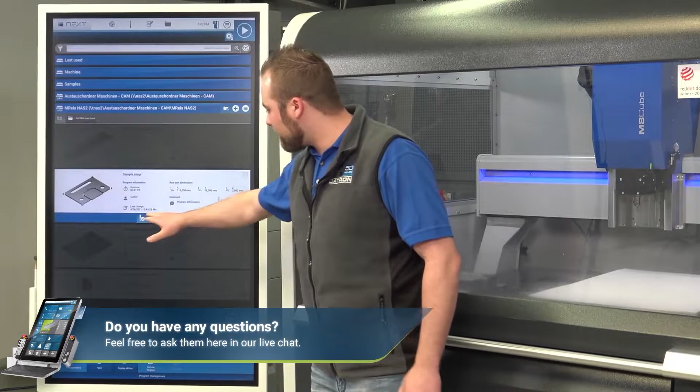On the right side, load program - there you can load it. Then we have edit and delete, so if you have to do something with the program, change something or delete it if it's wrong. The next step you can do is check your tools by tapping this button. Then you can see which tools you have programmed, and which tools are inside the machine and which ones you have to put inside the machine. We see here we have just one in the machine.

So this is this one, and here we have one that is not in the machine. This is a demo screen - we'll do this later with Mark also on our machine.

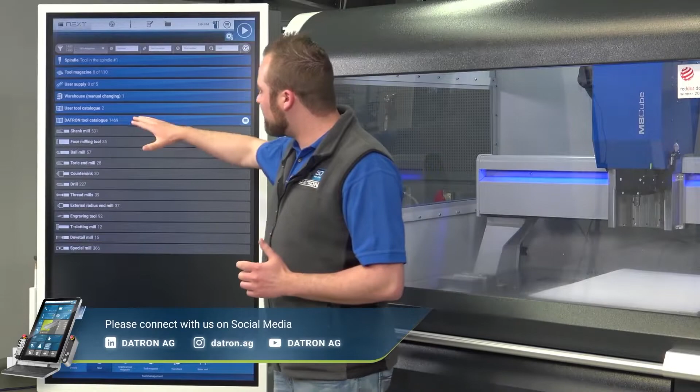So what we want to take a look at second is the tool management. You don't have to use the tool check by the program, but you can also check your tools by the tool management button. So here you can see all the tools that are inside the machine. But also you have here the Datron tool catalog where you can find every tool and also take a look.

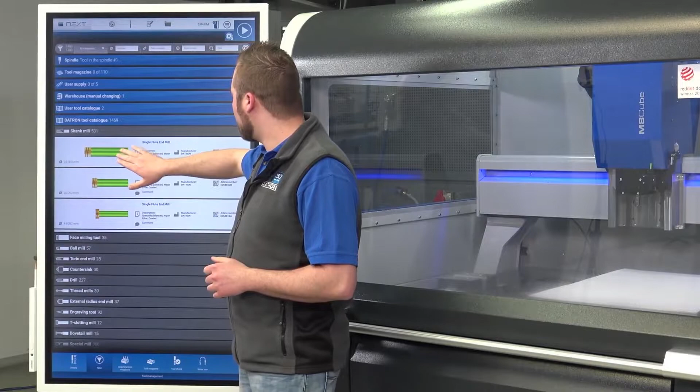So if we tap here, just a single flute, and then we can see a lot of information about the tools, and also we can set up these tools inside of the machine, or the tool management.

Next we want to see the workpiece setup, and for this I would give back to you, Mark. Right, so once we've loaded the program, either from our network folder or directly on the machine's hard drive, you just clamp your part.

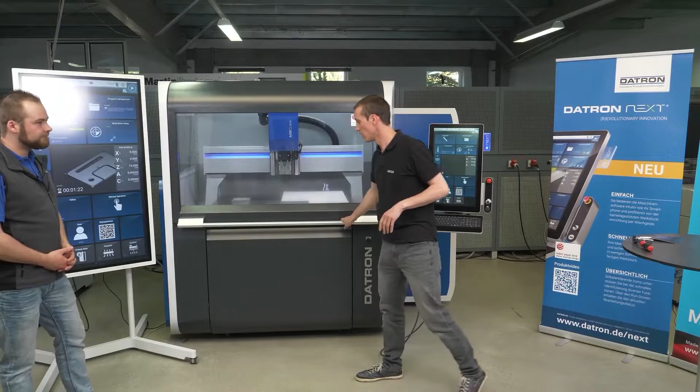In this case I just have a 3mm aluminum plate. I put that on my vacuum bed, switch the pump on, so work holding is just by vacuum.

And in this next step, that's what makes the software so special. It's measuring the origin, the orientation in the entire machine with a camera, with a live view, just by swiping over the display and drawing a different shape around the part, whatever it is.

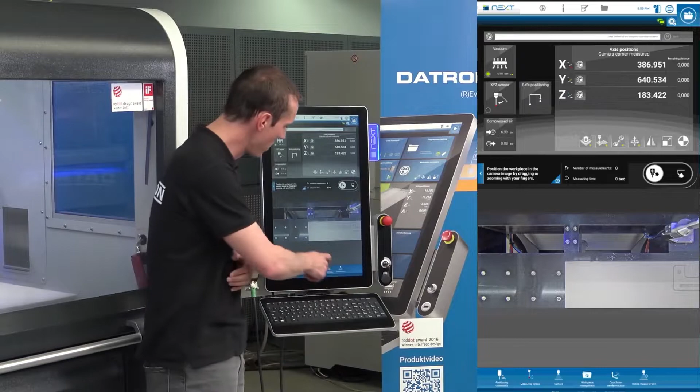So let me show you this. You go to workpiece setup, and now I've got a live view because there is a camera right on the z-axis. So if I drag over here the machine moves, and I keep dragging around, and you see the machine just follows where my finger goes.

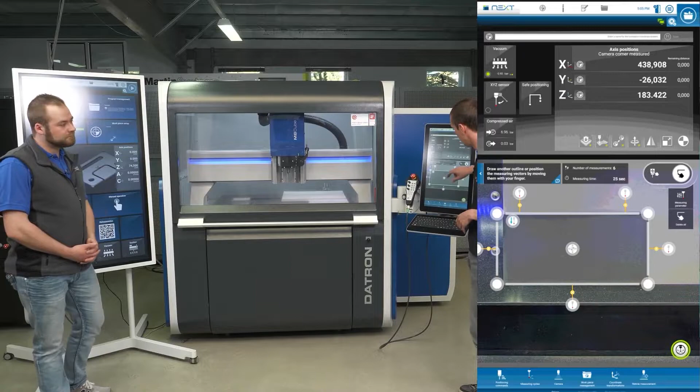So what I do now is place my part visually in the center of my machine, and all I do in the next step is draw around it like a rectangle shape. It doesn't have to be super perfect. And you can see it already brings in some measuring points.

And after hitting probe, the 3D probe will come and touch off this part, so it is perfectly located not only in X, Y, and Z direction, but also in rotation. So it's also getting the right angle if it's shifted and rotated around some axis.

Which is a big thing when it comes to a two-side operation, and you want the first side to match with the second. So that is an extremely important function to have, and you don't have to deal with hard stops, mechanical stops, and dial gauges to bring the part perfectly aligned to the machine system.

So that's it. All I did now was swipe over a little bit on the display, and my zero point is all set.

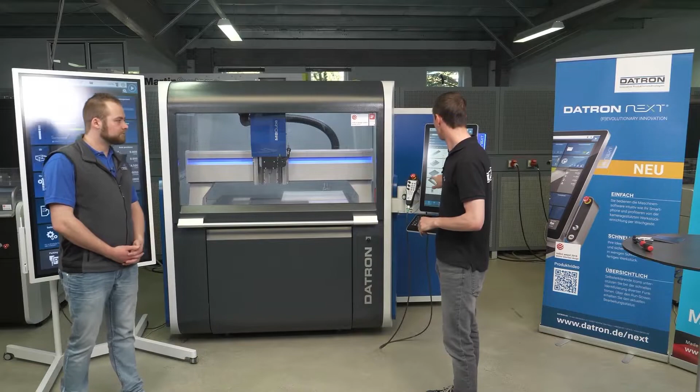Again, I go to my program management, just what Mario said before. I load the file, I get my preview here, and I'm just saying one execution, and hitting the play button.

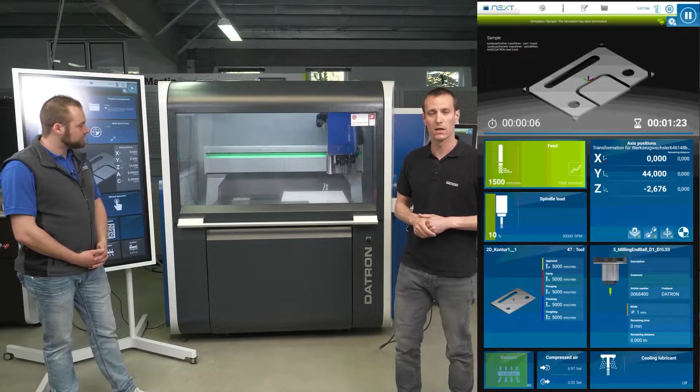So now the machine goes to the back, grabs a new tool, the first tool which is programmed in this program, and starts to work on this aluminum plate.

So there's nothing special on this part to see now. It runs for like a minute or so. Pretty straightforward, we're cutting something out on the vacuum table. We're going 3/10 deeper than the actual stock size, and then just taking the part with very clean edges right out of the machine.

Simply a great way of setting up workpieces, of setting up CNC programs. So Benny, can you tell us a little bit about the whole development stages? Where did it all start and what was the idea behind it?

It's a little bit Datron specific, the way we went with this control. In the past we made our own CNC control from scratch, called the HSC Pro. Most of you know them, and it is now 30 years old. We spoke about the age—in this kind we have a console UI, we have MS-DOS and things like this. And this is the age of the old control.

At one time we thought about the future of the controls. Make or buy, again this question. And we said okay, the Datron way is again to make it by our own, bring our own features inside the control and make it from scratch again. Yeah, and that was the first steps for it.

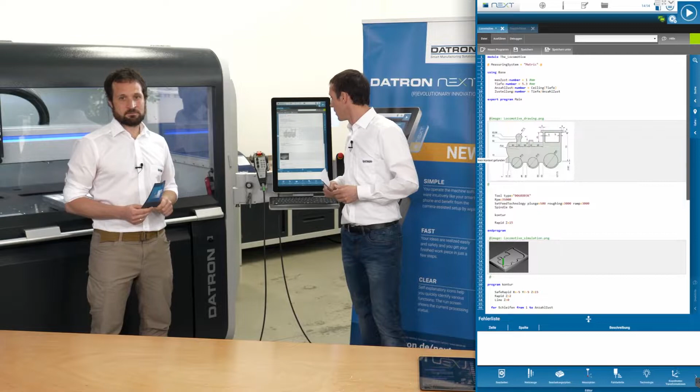We're currently adding new functions to the software, to the code, and we've brought you one of the latest features. When we take a look at the code now, here we can see it. This is the code down here in the training part, and I can now load pictures into my code—PNG files, JPEG files—and even make them larger.

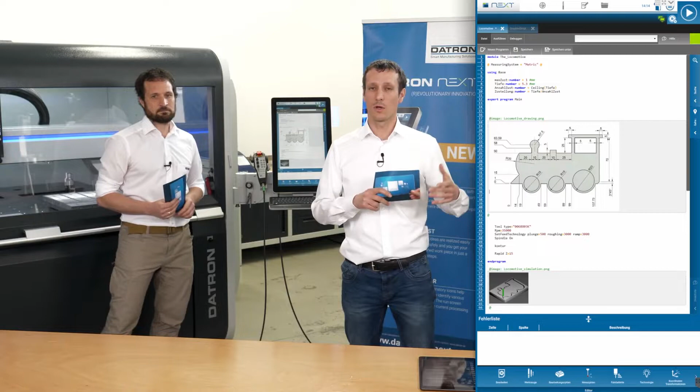In this case, I've just exported a picture of my drawing to that part and brought it into the code, so I don't have to toggle between my drawing, whether it's a hard copy or soft copy. I can directly have this in the code to see where my next step is, where I have to program it. This could be really interesting for anyone with different fixtures or setups that need some sort of visual feedback. It's just a great function.

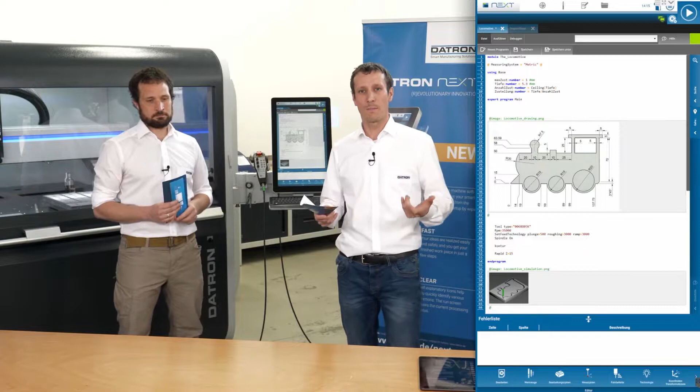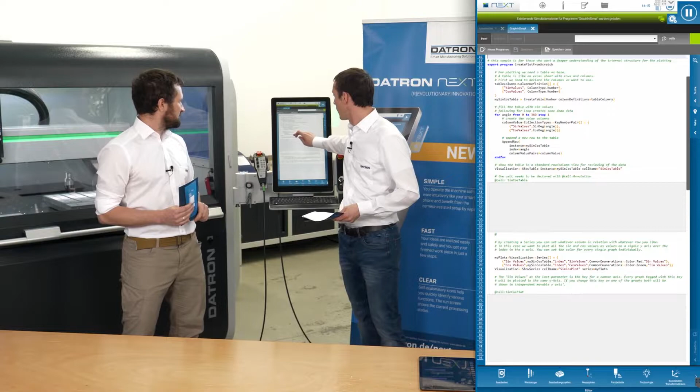Down here is another one—just an export of the final part of the simulation. That's kind of great. We also have a file here that displays some mathematic functions, like graphs and other plots that come, for example, from the touch probe. So measuring and validating parts can now be done in a visual way.

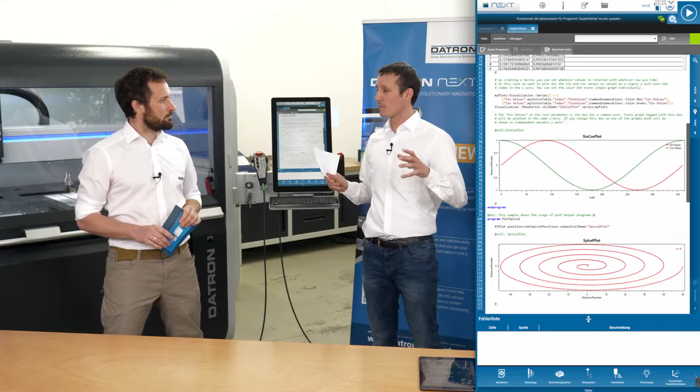That's one of the features we spoke about before—it's not only the CAM side way, it's a way for special applications. We bring mixed content to the editor: images, graphs, measuring data, statistic stuff, table stuff, and bring it all together for special applications.

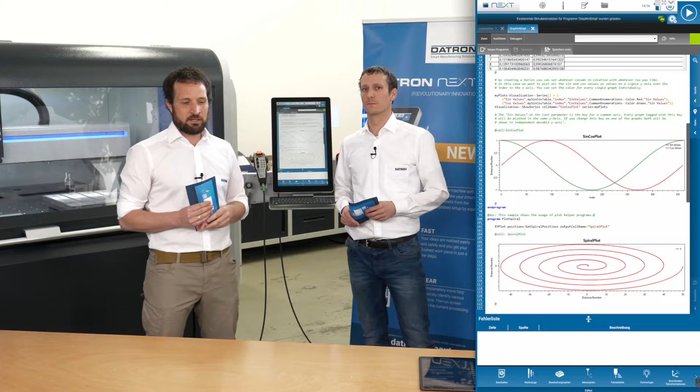Some of the nice features are if you have molded parts with irregular shapes, you can measure it on the machine and adapt the passes and things like this. These are features that I think let us make a new approach to complicated applications in normal cases, using the flexibility of the new control.

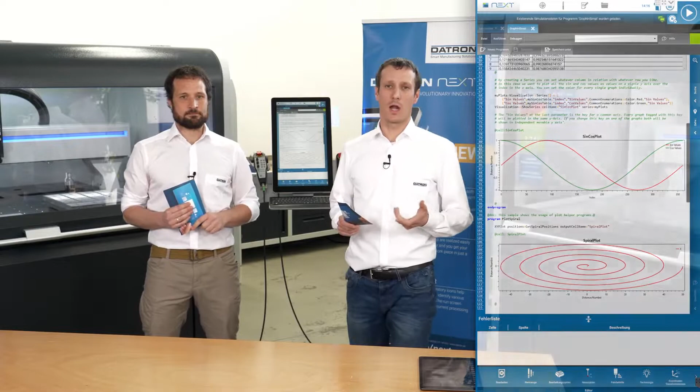Sounds great. But still, we have features that have been available for a longer time—great add-ons that save your work holding or make your everyday work a little bit easier. Let's have a look at the next clip where we explain the different software options. Right, what's next? Software options.

I made this part once. What are our options if we want to make multiple parts of these? The main thing is when you do multiple parts, you have to set up the same as you do for just one part—check your program, check your tools, and set up your workpiece.

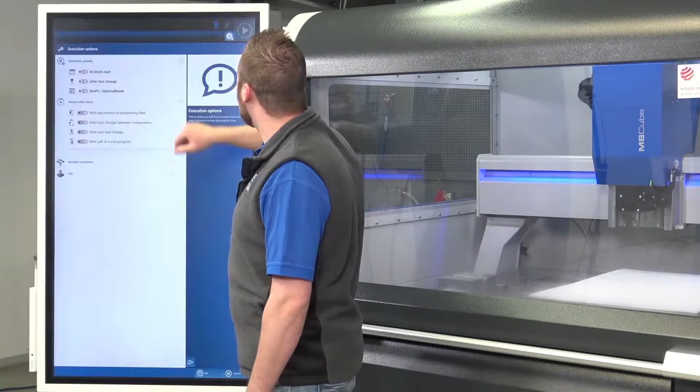What we have to do now before we start the program is, on the play button on the left side, we see this small button here with the function multiple execution. If we start this—come on. We see these points we have to take a look at. That means we have to do all operations with the same tool first, across all of our parts, so we save on tool changing, which saves working time. It's very easy.

We have to set up the layout, so that means we have an offset in X of just 120, and in this case I'll do 3 parts more.

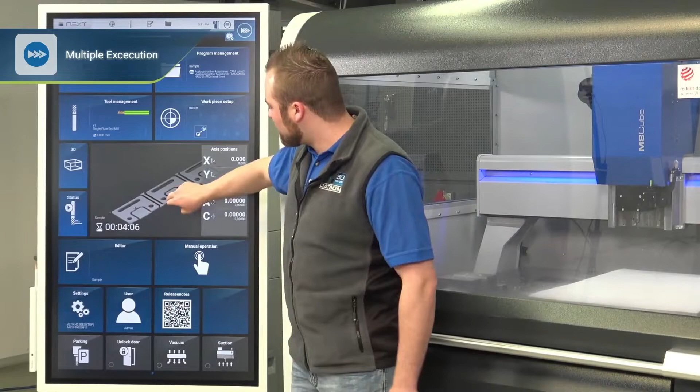You can also do this by setting zero points, but in this case we just do this with a layout. All we have to do now is save here, and we see in the simulation that we have just now three parts here. It's very easy—all you have to do is set up the multiple execution.

Speaking about multiple execution, if you have a big sheet on the machine, and you want to get the most parts out of it—say you cut 100 small parts out of a big sheet, this is 1 meter by 700—you can do a lot of parts at a time. You want to make sure that tool wear and tool breakage are observed, that the machine has an eye on this.

And that's why we have the so-called sister tool option. It will check if a certain limit of path the tool has traveled, or a time, has expired, or if tool breakage is detected by the tool probe in the back of the machine. This means you can set up the same or similar tools, same tool type, multiple times in your tool magazine and just keep the machine running. Whenever it detects offsets in length, or the time expires, it will automatically change tools and continue the program, so you don't have to worry about changing the tool manually and interrupting the program.

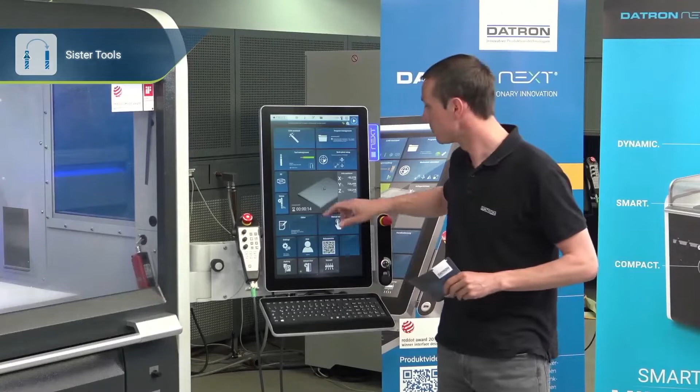I have prepared a little demo that I'll run in the air now, which will show us this. We just cut a virtual rectangle, and we can see on the screen how the limit—the maximum path, which I've set to 1 meter—is going down, and it's going from green to red. So at the end, the tool is not good anymore.

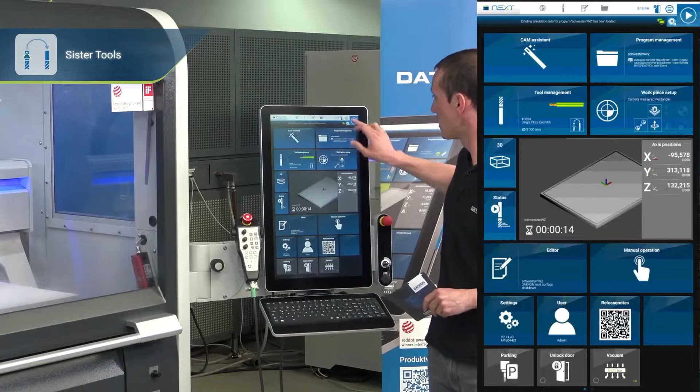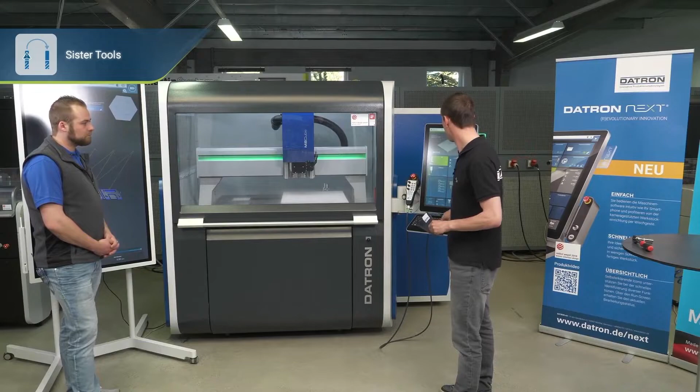So let's just execute this part. The remaining time has already expired here with the wrong tool—let me just reset the time again. There we go, I've got a maximum of 1 meter, just as I said. Now on the status screen down here, you can see the remaining distance.

Let me get on this side here, so on our screen down there—turn the knobs down a bit. It's now going from green to red, which tells us the maximum time is expiring. So for the next part, it would grab a new tool.

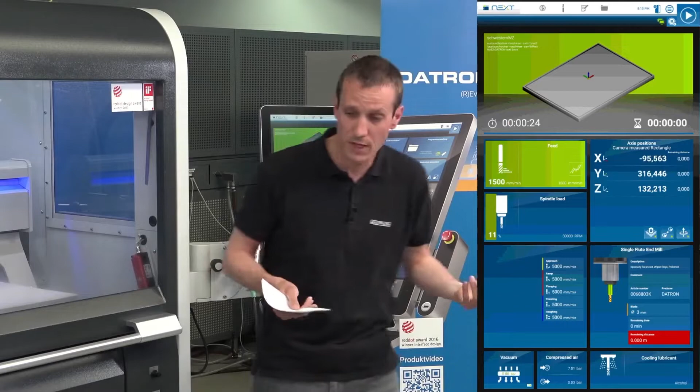That's a great function in combination with multiple execution. If you utilize the machine with multiple parts at a time in combination with sister tool management, that gives you a very stable process, I would say.

All right, what else is important to know when it comes to working on the vacuum? What software options would you recommend, especially for vacuum, but not only?

Not only for vacuum, but it is a very easy yet special software function—we have to save our tool and save our clamping system. So here on the workpiece geometry, we see protecting areas. These protecting areas protect your clamping system, and especially the vacuum. It's very easy, because you just have to set a measurement point and set up the complete machine room for this.

And also, you can do this using a normal clamping system, and also the 4th axis—axis 4 can also be used there.

Now, if it comes to parts that are not perfectly flat, just like this one you can see—I've bent this part a little bit. It's another flat piece of aluminum, and I've bent it like an S-wave or S-shaped part now. What do you do if you want constant engraving or constant machining on this?

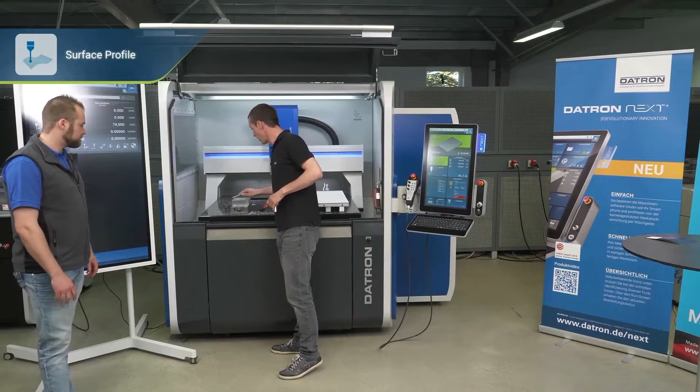And I'm bringing this part now into my centric vise, and what I'm going to do first is probe the origin again, and after the origin we're doing that measuring field.

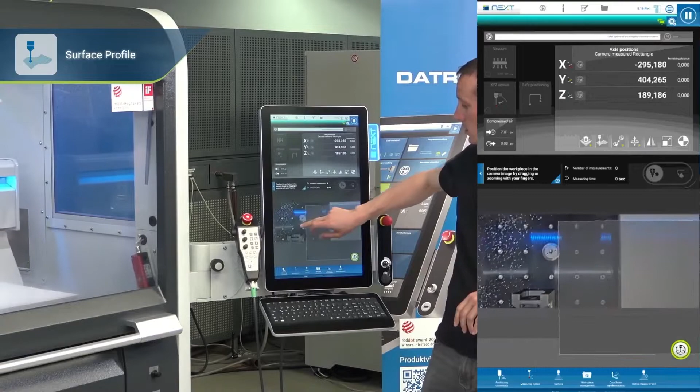So again, I'm just dragging over, you see this? Over this part, we can clearly see our vise here and the part. First I'm drawing this L shape, and that's another important thing to know. Like on the part before, I've probed a rectangle, the center of a rectangle, but in this case we just probe a corner, and there are different cycles possible. It could be either a round shape like a bore, or a big pin, rectangle, corner, edges. So there are multiple options possible.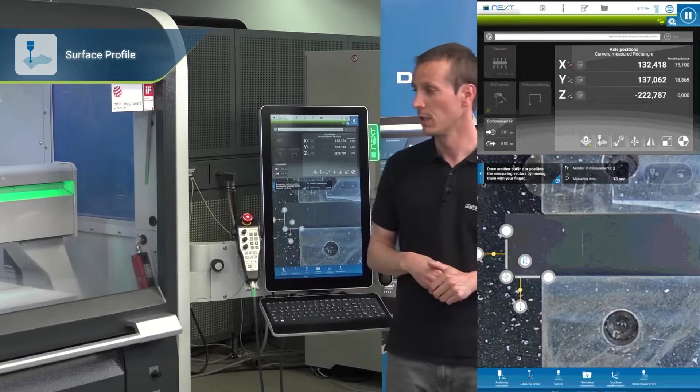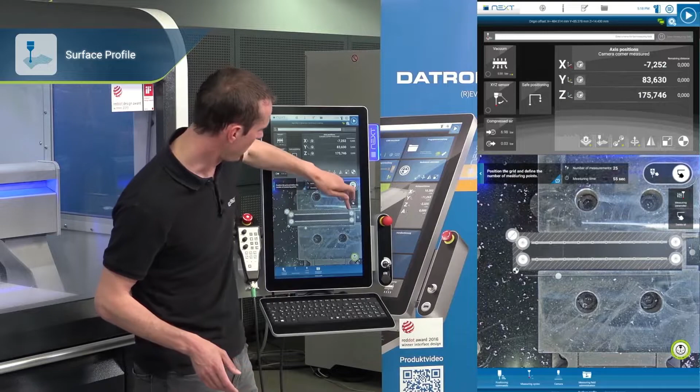We probe this first, and in the next step, I'm going to draw a rectangle that gives me multiple probing points over this surface. I'm going down here to surface profile, still in my live view, zooming in. It's extremely easy to use, and very easy to learn too. If I draw this rectangle, you can see there are multiple points. I'm reducing the rows in Y and doing a few more in the X direction, making sure I'm not beside my part, and once again I'm just pressing play, and the machine starts probing this part over multiple points in a grid of like 5-10 millimeters, whatever it is.

New on the actual software, which just came out, is that if you want to build in the measuring cycle that you've done with your finger, you can also just copy this information and bring it into the code. So if you set a job up and you just want to start it on another day, you don't have to do this setup again. You can directly copy the code to the programming, to the actual cutting program, and it will be executed as well.

Now here comes the last probing point, and I'm loading another file. This is just a simple engraving that we're going to do now, and it's going to start doing like a Datron Next font kind of thing that we engraved now. Once it's done, I'm going to show you how this came out and how this looks if it's engraved very evenly.

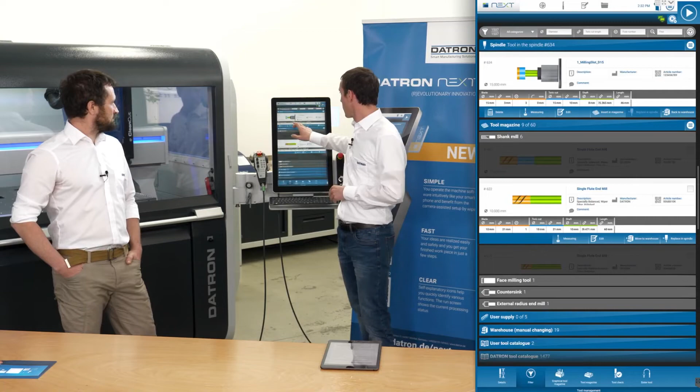Yes, it is. Can we just see the live screen again in our picture? Then we can display this right here. So I am now on my active tool that is in the spindle. I get a warning if I want to edit it. And down here I have tool service lives.

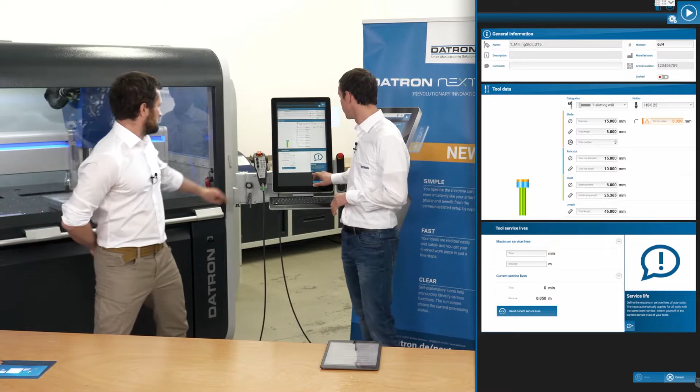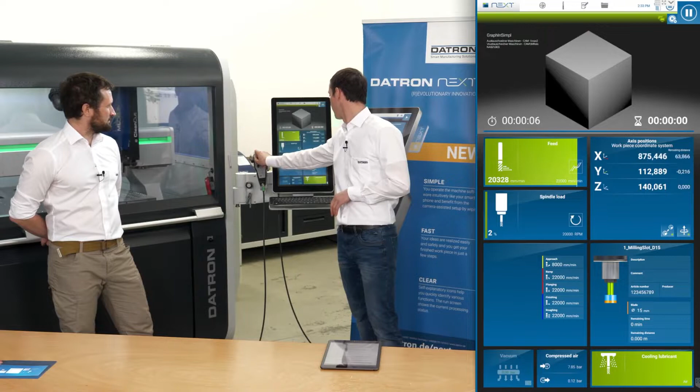I think this was mentioned in one clip of the software options before - you can set limits. So whenever I set a limit of, let's say, 0.05 meters for this tool, and if I now start an operation, let's just say we want to start a face milling operation here, 200, that looks fine. And if I now go to my status screen - I need to activate sister tool management, because the idea behind this is it's counting the time, but if I use sister tools, I can use the same tool again. So quickly activate this.

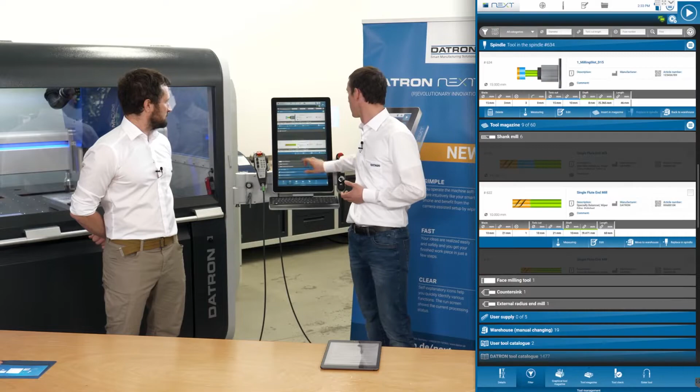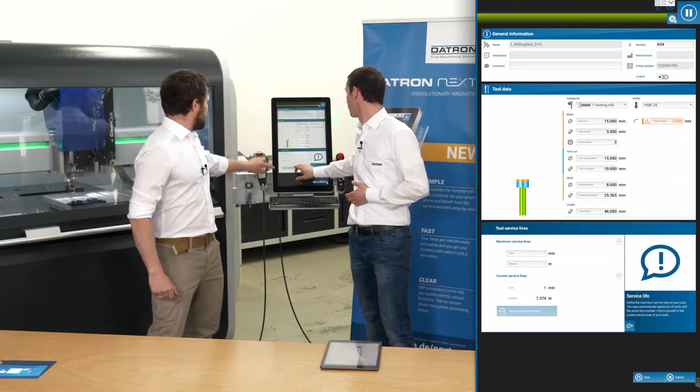This is not counting because probably there's no sister tool in. No, the easy answer is it's live, always a problem. Mark, don't set limits for the tool. Oh, that's what he's missing, sorry. Currently - yeah, right, you could have told me before. All right, now we're making it the right way.

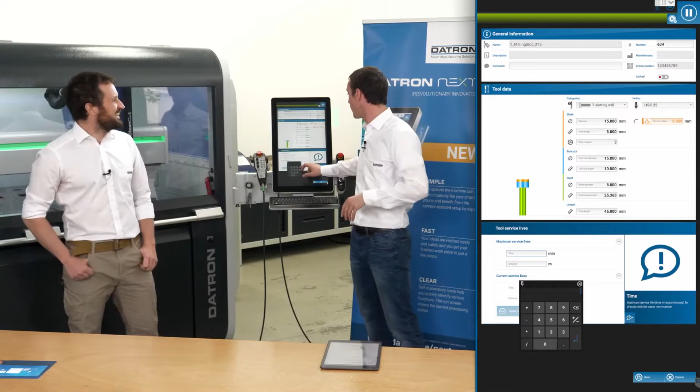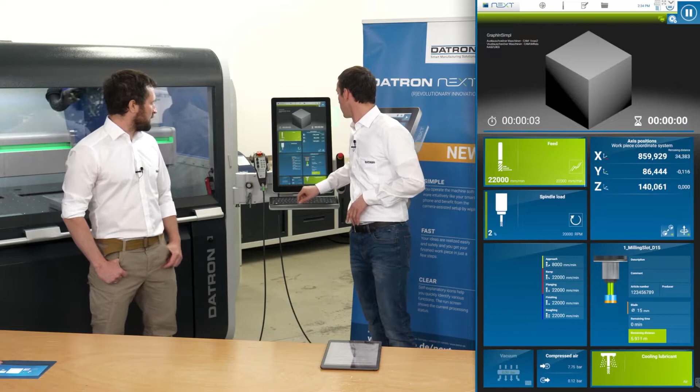So what we have is the tool life displayed down here. Now the current service life is saying 1 minute and 8.9 meters, almost 9 meters. So what I set is a tolerance of, let's say, 5 or 15 meters here. And if I now restart my cycle, in the end the tool must be green. Right now, in my lower right corner here, I can see the color changing from green over yellow going to red whenever a tool's life is expiring towards the end time. So there are these two values - we see the actual tool life counting upwards in the tool management, and we see in the status screen the remaining time or distance.

Next question: how can we set up the height of the XYZ sensor while it measures the X and Y side of our piece? It would need to be lower than the default position. So to make the question clear - if this is the side view of your part and my fingertip is the probe, you get the reference on the top surface. Now the question is, how can I go deeper than the default setting, which is 0.5 millimeters?

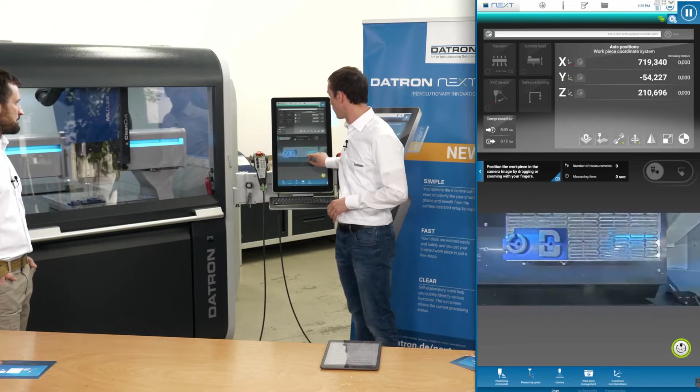So if you have a larger chamfer, let's just fold this - now I have a chamfer here, so I need to lower it. I've already put a part on the machine. I go to my camera measurement and make the pre-positioning. So let's just measure this corner.

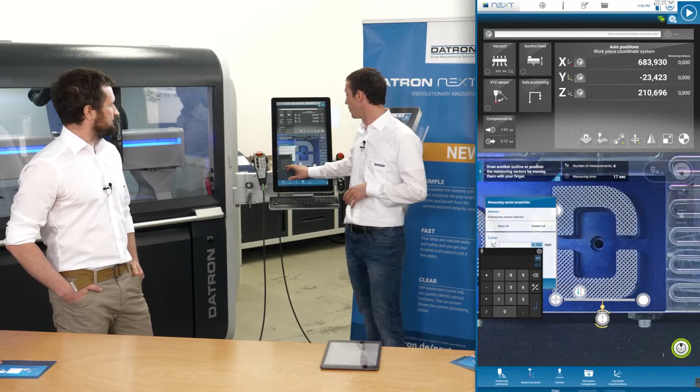What I do now is tip on one of the three measuring points of x and y, measuring vector properties. You can select all if you want, or have them individually. Then you go to z offset, and instead of minus 0.5, you can say minus 3. We don't have a camera inside the machine now, so if you just take a step back, the probe goes a little bit lower than the default. That would be the easiest way of avoiding chamfers or coming around.

The interesting thing with the camera measuring stuff is we have the real easy way for the normal solutions, but you can nearly adjust everything of the feature. One point, many points, you can measure a circle, or a whole circle, or only a segment of the circle. You have real freedom, and it's also so easy to use.

The question that comes up very often is, can we implement the probing into the code? The clear answer is yes. We can load origins, definitely, and we can even load the measuring profile itself. We can set up measuring or origin detection cycles and so on. One interesting feature is you can also use this camera-defined measuring feature and paste it right, defined from the camera side, into your program. It's all possible, you have a lot of freedom to adjust your measuring application. If you have random numbers, you don't have to type them in manually.

Next question: which tolerances does the XYZ sensor have, or can measure? This is a Renishaw probe that we have on that folding arm, which has a tolerance of around 5 microns. The repeatability is less than 5 microns. In the end it all comes down to the entire system - what is the temperature in the hall, do we have a climate-controlled room, what is the entire setup, does even the material grow or shrink? That all comes into play when it comes to measuring parts, but the repeatability of the probe itself is 5 microns.

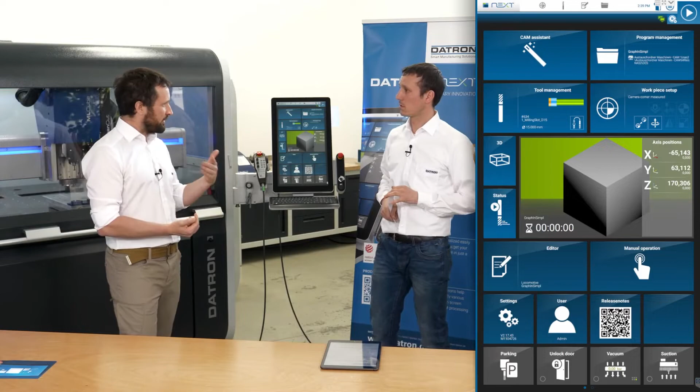But some people want to work with tool wear in each direction. That means our zero line, or the line that we program, is 0, and we want to compensate either more or less. For this function we generate a tool center path, and with a special command called tool compensation on the Datron control, you can tweak the path a little bit in or out, only typing in the correction values and not working with the radius of the tool. That's the path correction command, called in the software, and depending on the post processor, you can put this into the output.

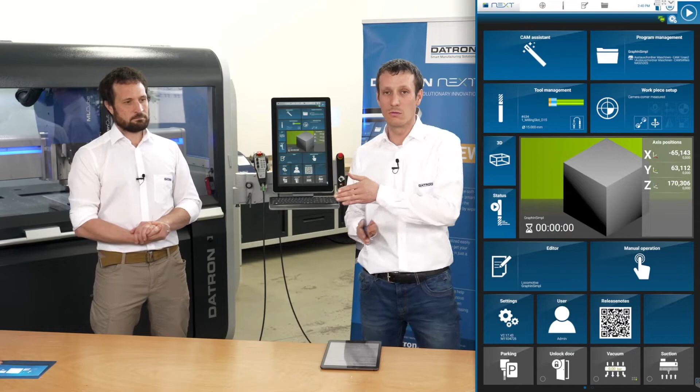The other thing is you don't mess up your tool library with some adjustment for only this specific part - you can make your adjustment just for this one program. That's also a benefit. If you have one tool that's making 3 different features, and you just want to tweak one of those features, you just make the path correction into that one.

The other thing is the same correction applies to the tool length. For this we have z-axis offset, which can then lower or set the entire operation higher for any specific value. Also a very great feature.

In my post-processor settings, I have these active every day and for all programs, so I have a big chance to modify each and every operation, normally on tight tolerances.

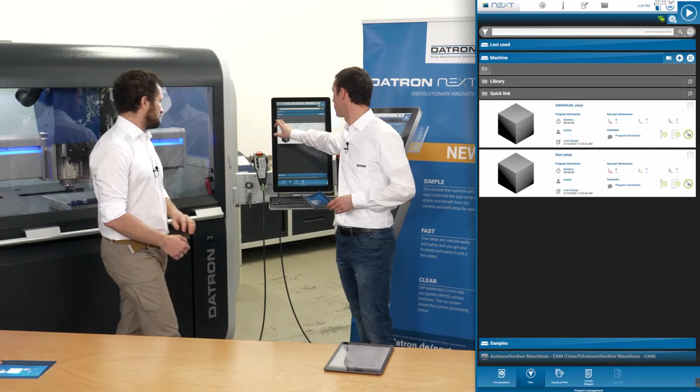So to get to the file, it's under machine. The G-code wrapper is the easiest way, under G-code. Yeah, we have a button down to it, but it's currently not connected. Give it a try. The G-code wrapper, where is it here? G-code, don't fall, here it is. It's under the samples, under the sampled files, and there is one section.

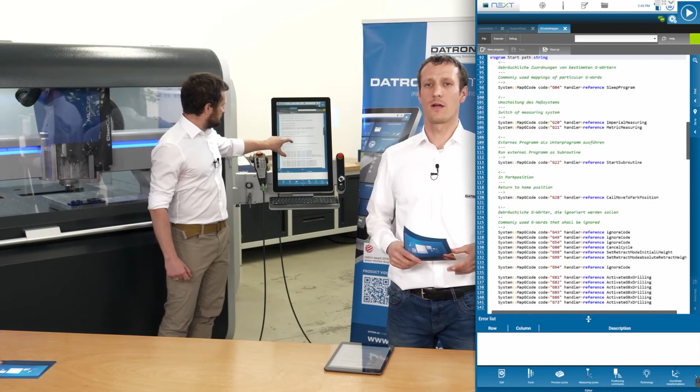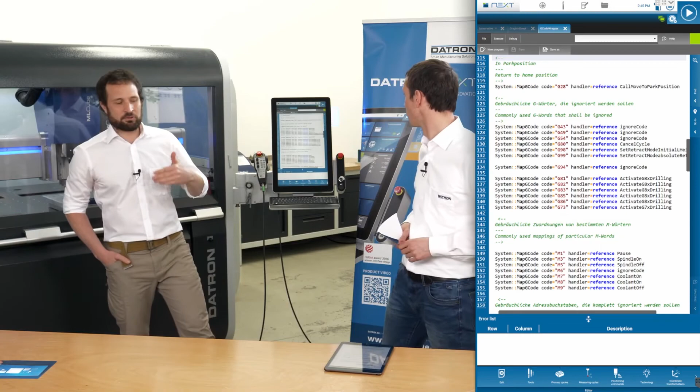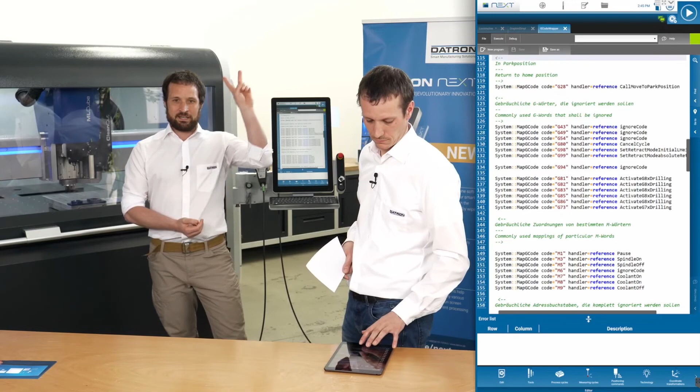You're zooming in now, and maybe you see some of the details here. You see some mappings of G-code 81 and things like this, mapped to a simple specific command, either G or M code. This means you're really free to customize the control to your needs, to your kind of G-code flavor. I think so, yeah.